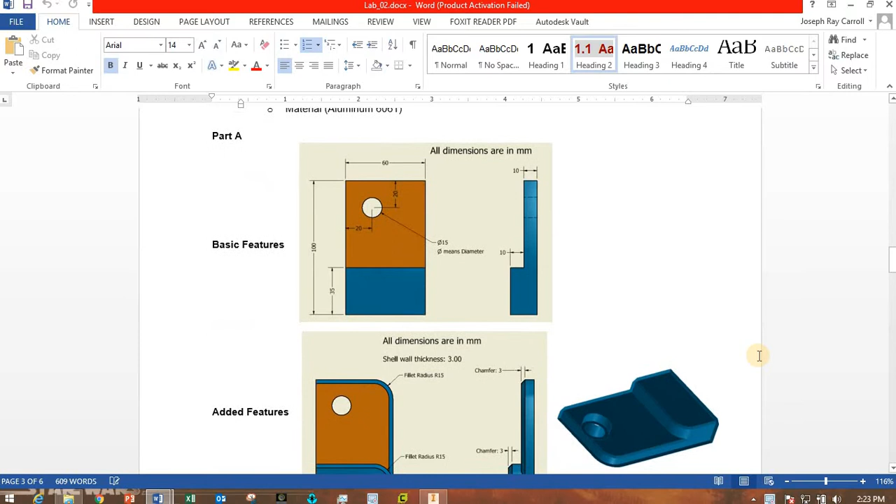If you have not tried to draw this part by yourself, I recommend you stop the video now and try to draw it without watching. It's not that hard to draw, especially if you've already completed these parts by watching the previous videos, since you should know everything you need to complete this part. Well, if you're still having trouble after trying it yourself, then this video is for you.

So here we go. First, go ahead and create a new part, and the first thing you should do with this part is save it.

Make sure when you save your parts that you're staying very organized. You should have a folder in your computer specifically for this class, then a folder specifically for lab 2, and within that, let's save this as part C.

Let's look at this part and think about how to draw it. There's a couple ways, and not necessarily one right way. One way is to draw this bottom profile right here, extrude up to make this base piece first, then sketch this profile and extrude this way to make that part. Or you could do it the other way around: first create this, extrude this way, then go create this piece here. Either way is fine. Let's see one way to do it though.

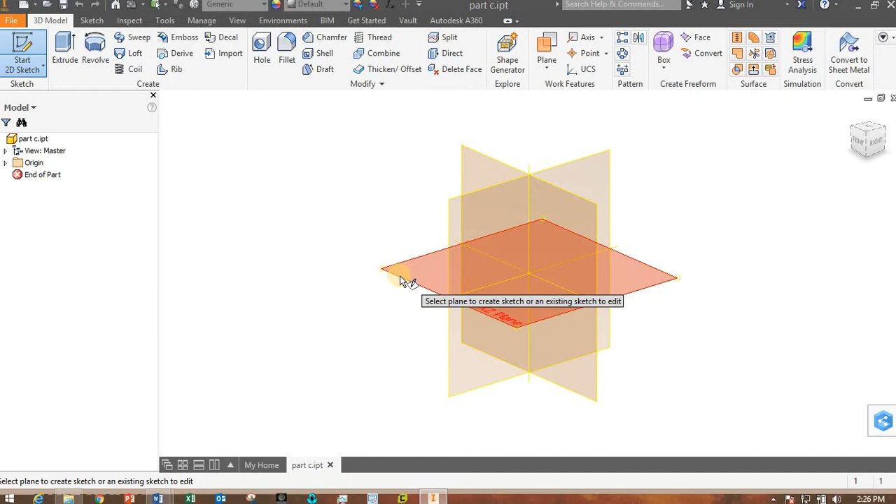Alright, so let's create a sketch, and I'll select this plane here to sketch on. Now the way I'm going to do it is I'll first draw this bottom, basically the bottom of this part, and then extrude up.

Now if you notice, this part is symmetric about this line here. So I want to keep that in mind when I design the part, and I want to draw it so that a mid-plane goes through the middle of this part. It will be helpful for creating things.

Watch this. I'll click on rectangle, and let's just draw a rectangle right now. Well, I want this rectangle to be centered here. I'll press escape to get out of the tool.

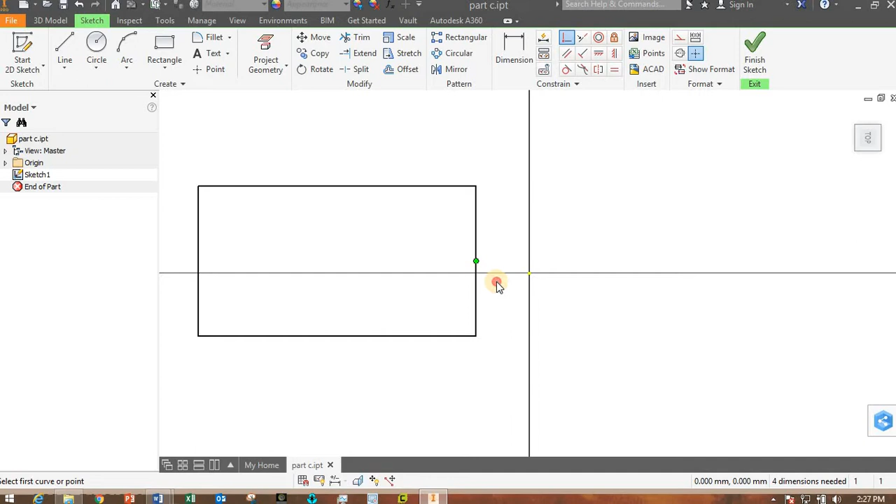Now I'll use the Constrain tool, and if I put my mouse here, that green dot is the middle of this line. So let's make that coincident with this part here. Now this line will always be in the middle. You can see when I move this line, it also moves. It always stays symmetric around this line.

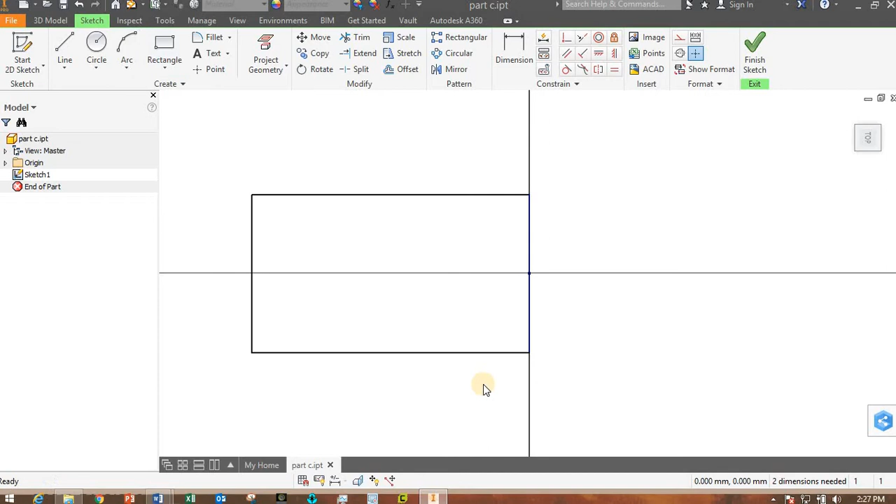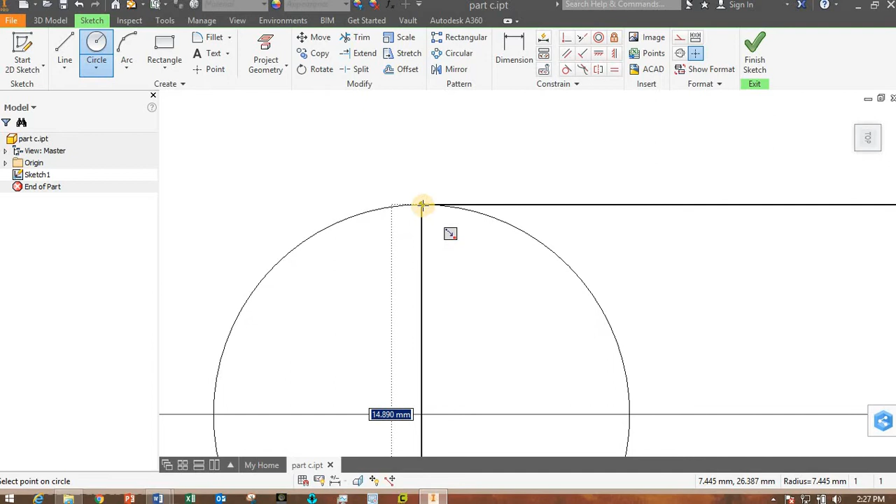Now let's go add in the curved part here. The best way to do that is to start a circle. Make sure your circle snaps to the midpoint of this line, and then make sure it snaps to this edge here. Notice how the center turns color - it's yellow now, now it snaps green. See that? Make sure that snaps green. Now the purpose of that is that if I change this dimension, the circle also changes as well, so they're linked together.

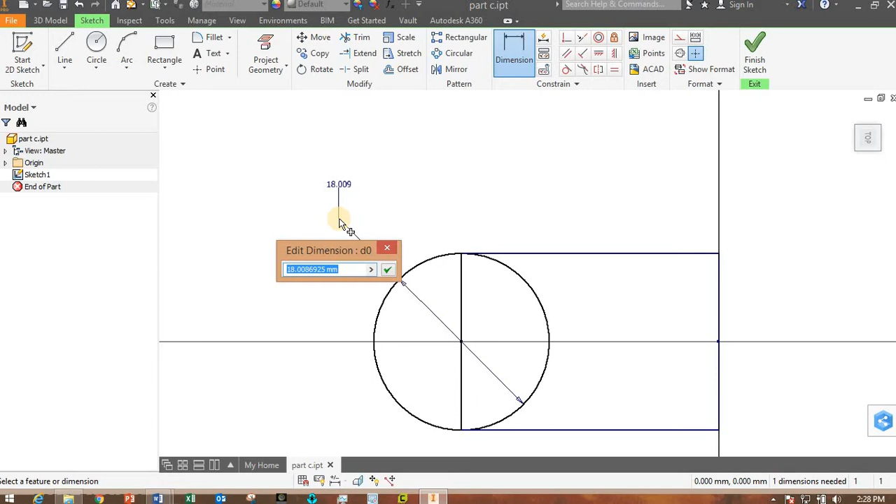Now I can just add a dimension. This length here, this diameter, is a 44 millimeter diameter, and the distance from here to here is 96.

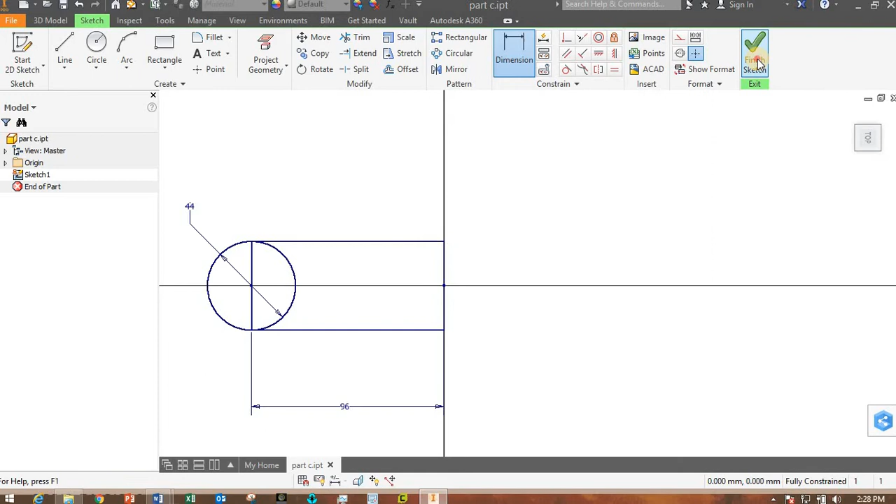Now I could also draw the slot right now, but it's good practice to try to make each feature as simple as possible. So let's go ahead and finish that, and now let's extrude up.

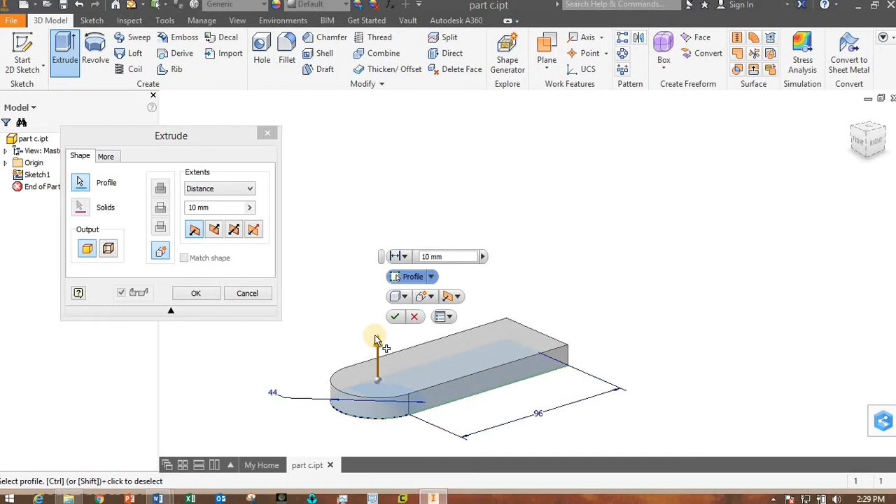Now I need to tell it what to extrude. I want to extrude this circle and also this rectangle as well, so both of those things. Now I'm going in the right direction, but I need to tell it how far to extrude, and the distance is 10. So I've got the base there.

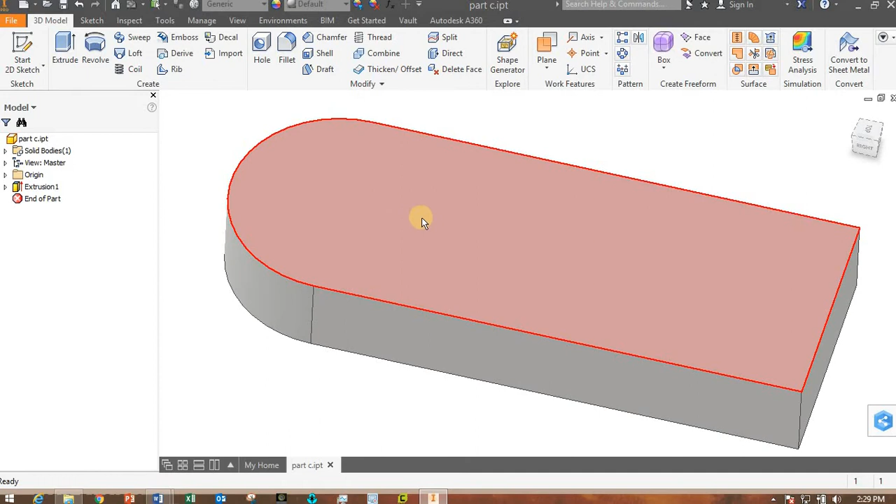The next thing I want to do is create the slot on top here and then cut it through the whole part. So I can create a sketch on this top surface, and there is a slot feature. If you click on this drop down arrow, here's a slot feature.

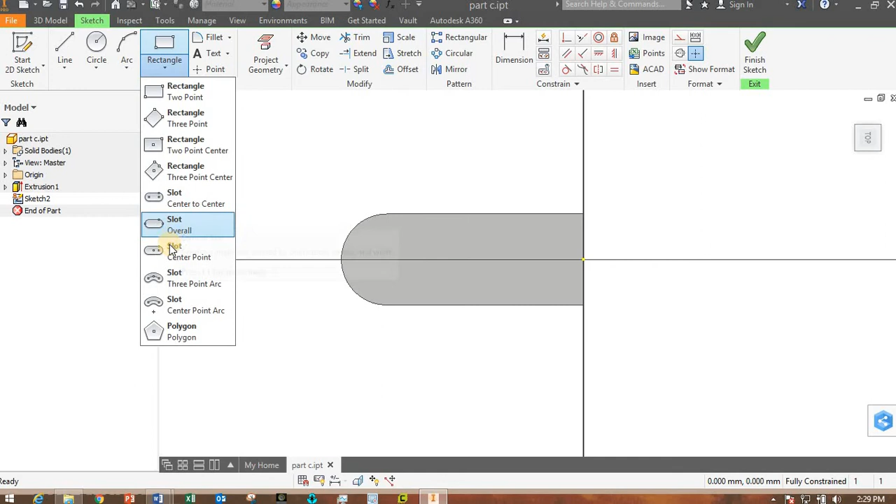Now there are several different slots, but it's basically just which way you want to create it. It doesn't really matter which one you click on. I normally select the center one, and I'll show you how I do this. So here's a slot. Right now this slot is not constrained at all, so I can move it around like this.

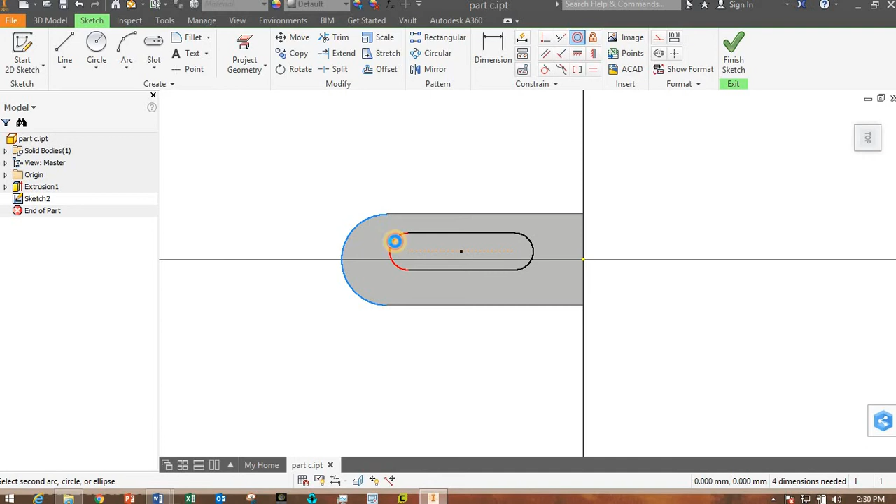The size is not constrained either, and this distance is not constrained, so I can make it shorter. But I want to constrain it. One way to do that is to click on concentric, and make this circle concentric with this one here. Now this point cannot be moved, and these two circles are concentric, which is what I want.

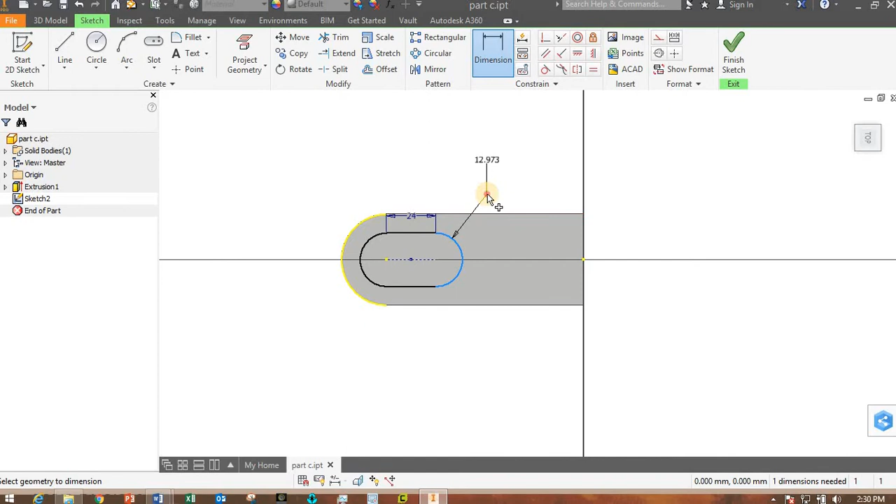Now I can go through and add in the dimensions I need. This dimension is 24 millimeters, and the radius here would be a radius of 8. Now notice it's turned color, it's blue, so we've fully constrained this slot now.

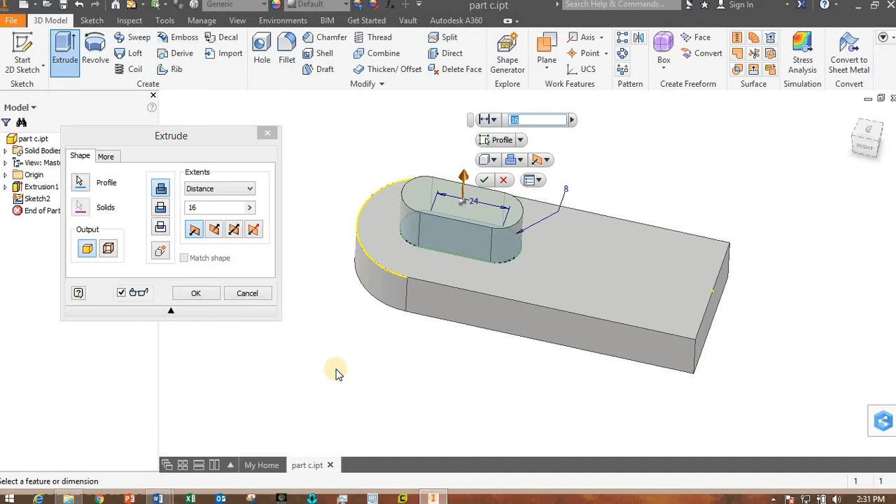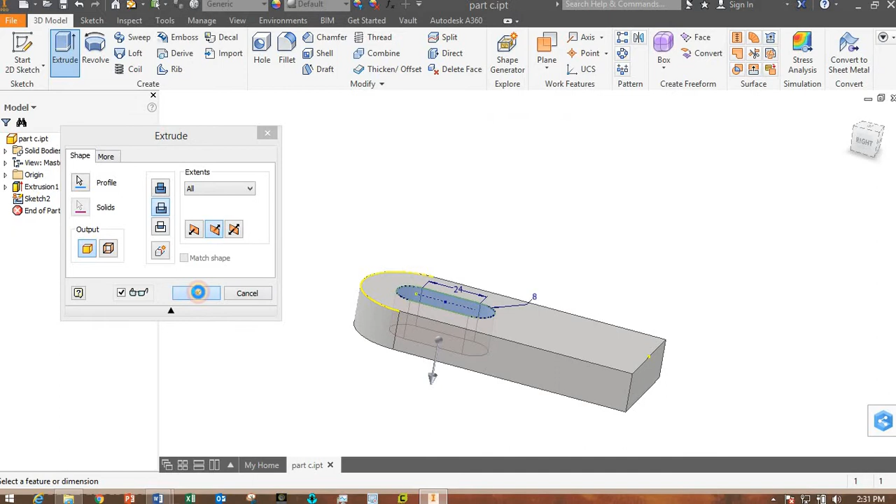Let's finish that sketch and extrude this. Remember, I want to keep my design intent in mind when drawing this. The intention of this design is that this cut should always go through the entire part, no matter how thick it is. So instead of making it a distance, let's make it through all. We're making progress.

Now let's go add in these parts here, looking at these holes. There are two main ways to do this, two good methods. One method is to first just draw one of these and then mirror it to the other side.

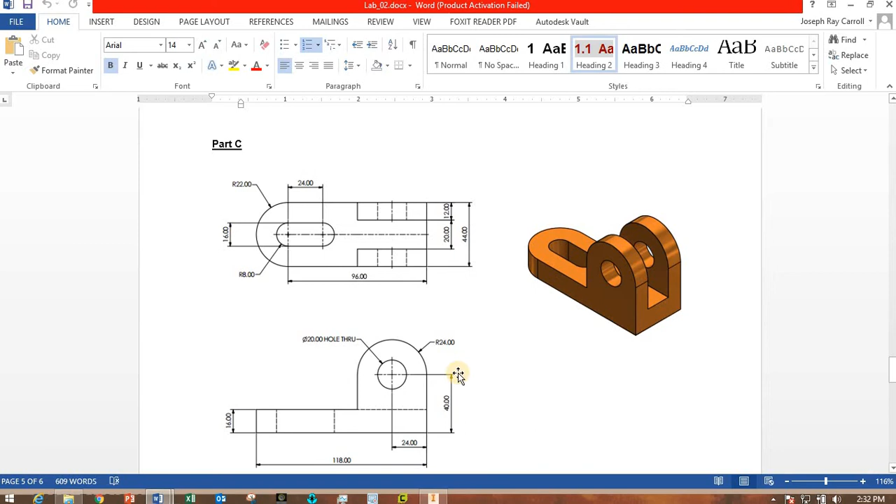I'll demonstrate that, but let me save my work before I move on. So let's start a sketch on this side here. I want to get a rectangle, and I want this rectangle to start right there. Make sure it turns green. If it's yellow, it's not snapped. I want it to snap to that corner.

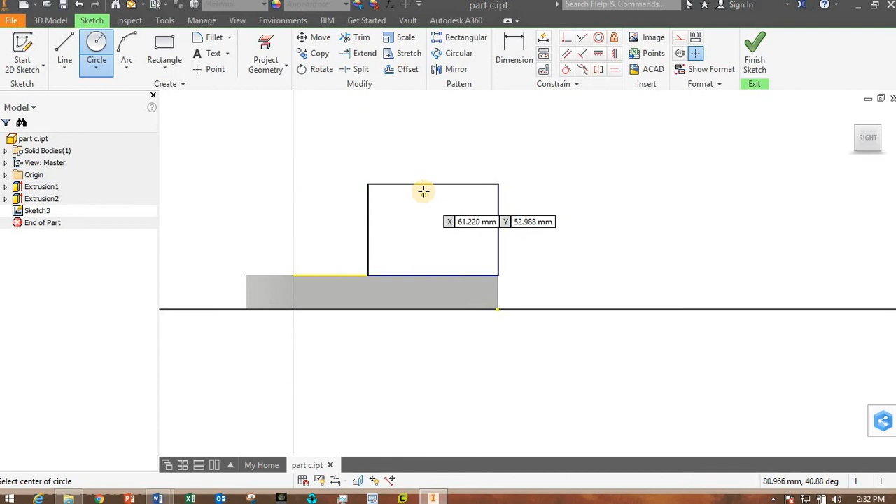And there's a rectangle. Okay, then we'll need a circle. Let's make sure it snaps to the midpoint. There it is. And then it snaps to this edge. There it is. Now I can go in and add dimensions here.

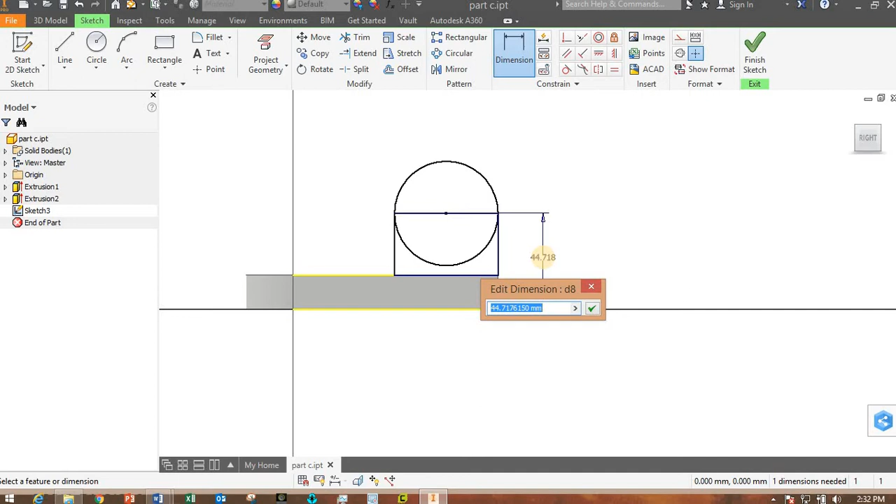We've got the dimension that goes from the bottom to the center of that circle. It's a dimension of 40 millimeters. And then this circle here has a radius of 24, so we could just do 2 times 24. This would be 48.

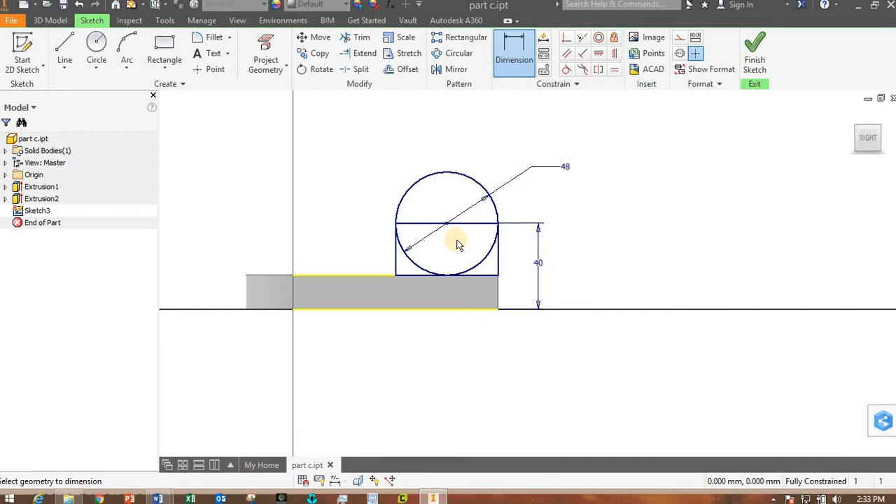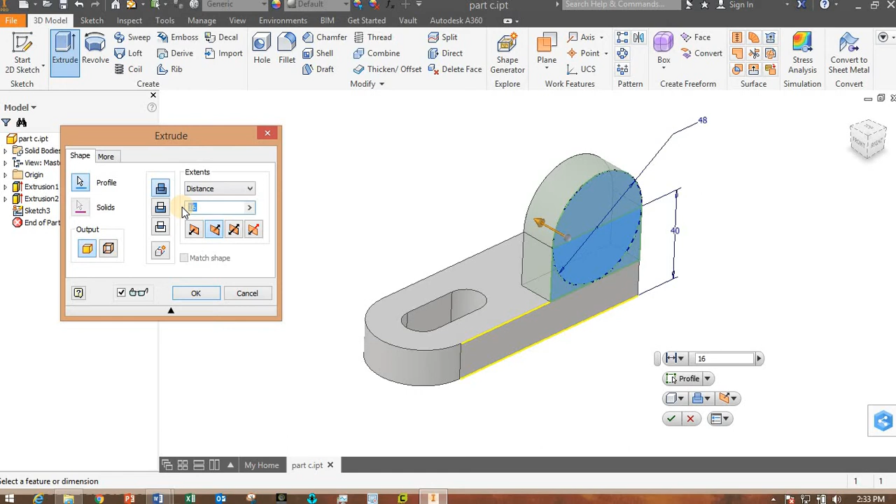Now I could go ahead and add this 20 millimeter hole here, but again, let's keep each feature simple, so I'll first create a solid like this. Let's extrude this rectangle and this circle, both of them. Now that extrusion is going the wrong direction, but that's no problem, I can flip the direction here, and then add in the thickness of it. The thickness is 12.

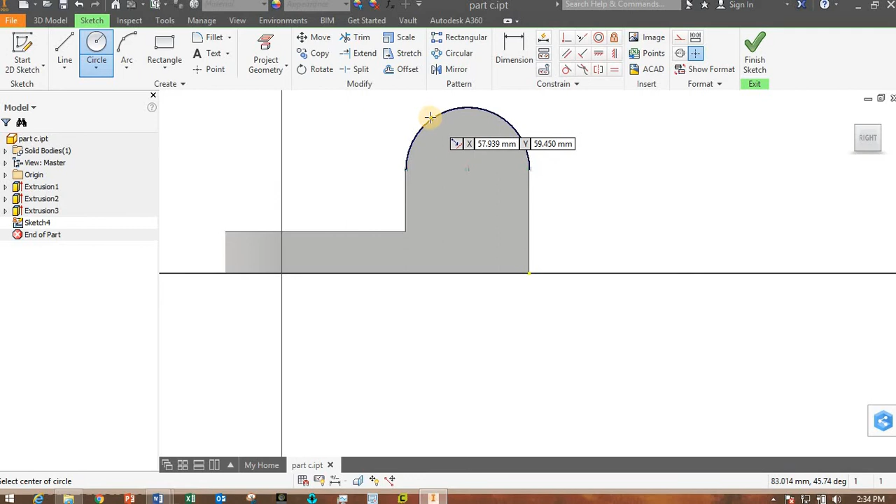Now let's go cut a hole. Let's create a sketch on this face, start a circle. Notice if I just put my mouse here, it's not snapping to the middle, and I want it constrained to the middle. One way to do that is if you put your mouse on this line and start to move over, you see it'll come up green. So it automatically snapped it there when I put my mouse over this line.

Now another way to do it is to just draw a circle and use these constraints. Let's use the concentric constraint and make this concentric with that. It's another way to do it. Now let's add in this dimension of 20. You can see it's blue now, it's fully constrained.

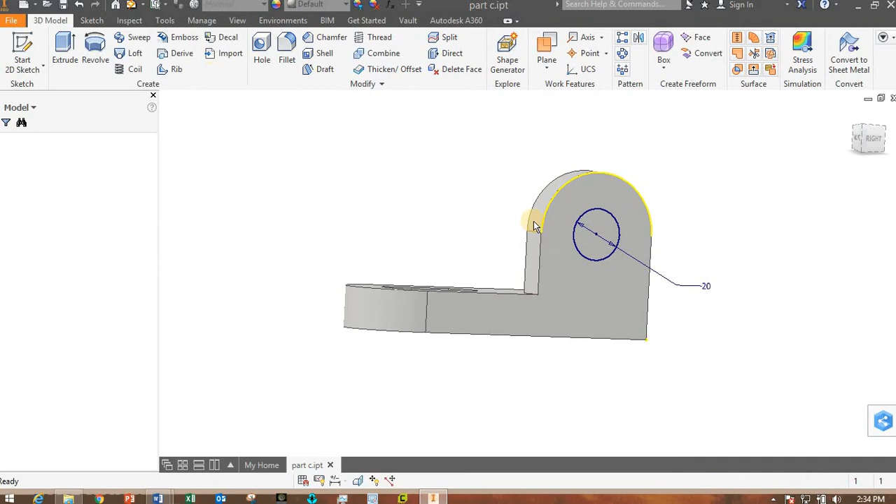Now let's extrude that, not as a solid, but as a cut, and go through all. Okay, now there's one of those. Now I just need another one.

Instead of drawing it again, since these two parts are similar, let's just mirror it. Here's the mirror feature. I want to mirror this feature and the hole, both of those things. Notice extrusion 3 and 4 is what I want to mirror.

Those are the features. Now I need to select a plane, so let's click this button that says I'm supposed to select a plane. I don't see a plane here, but it's over here under the origin. If I click this drop down arrow, I can see... is it this one, not this plane, not that one.

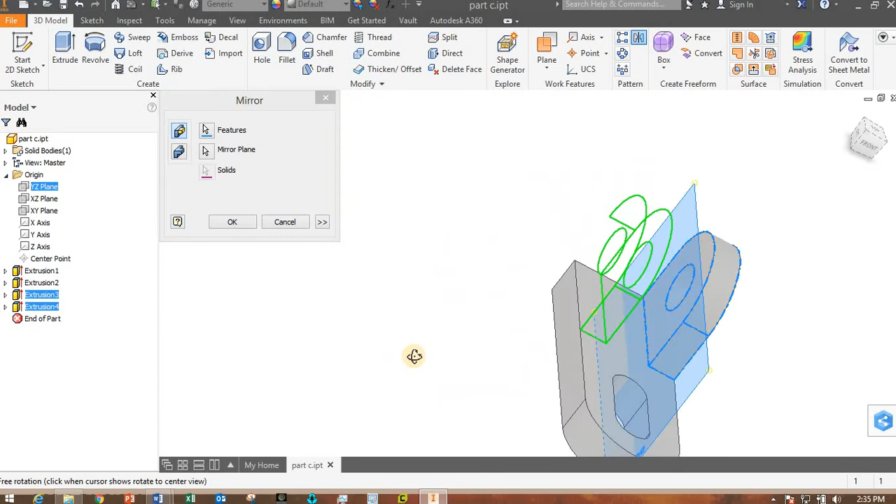Okay, that's what I want to mirror about right there, and you can see the preview. Click OK, and there it is. Okay, so we've got it.

Make sure to save that work. You should also go through and update the iProperties. Make sure you put your title here.

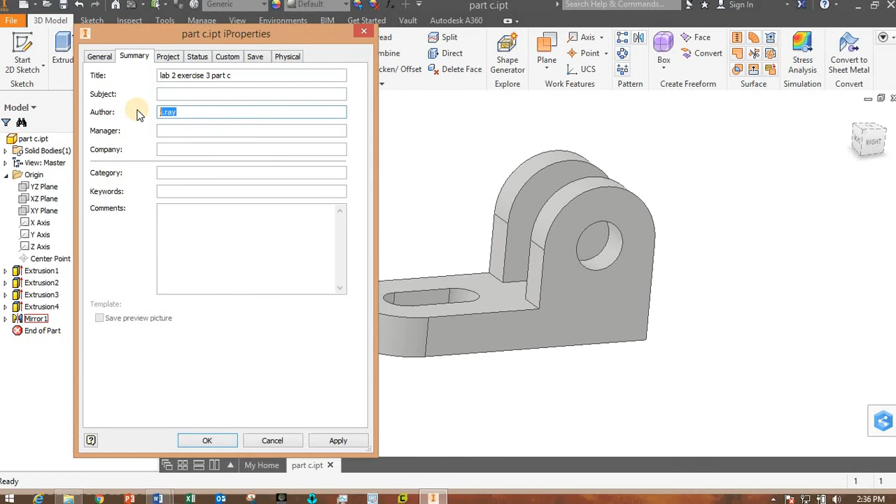Exercise 3, part C. Make sure to put your name here, manager, any description, company. Make sure you add in what type of material it is here.

Now let me show you another way to actually do this.

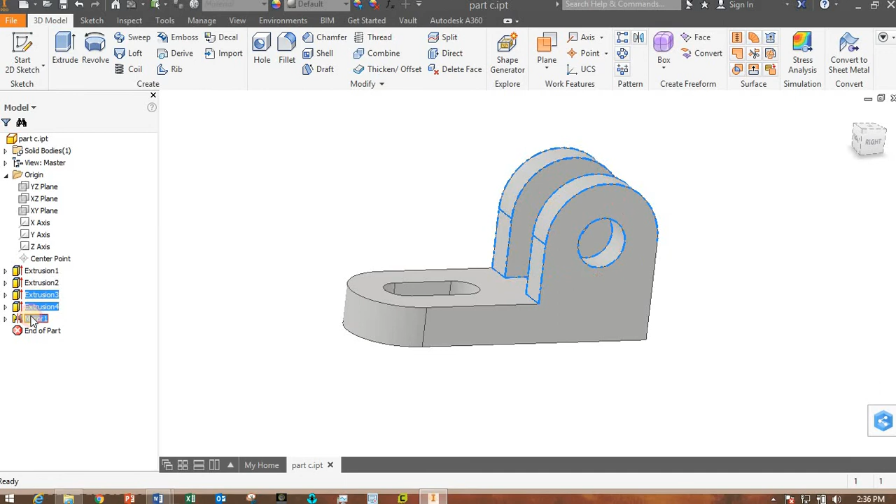Instead of actually drawing one of them, let me delete these. Alright, so let's say we're started here, we got to this point, and I want to draw these parts here.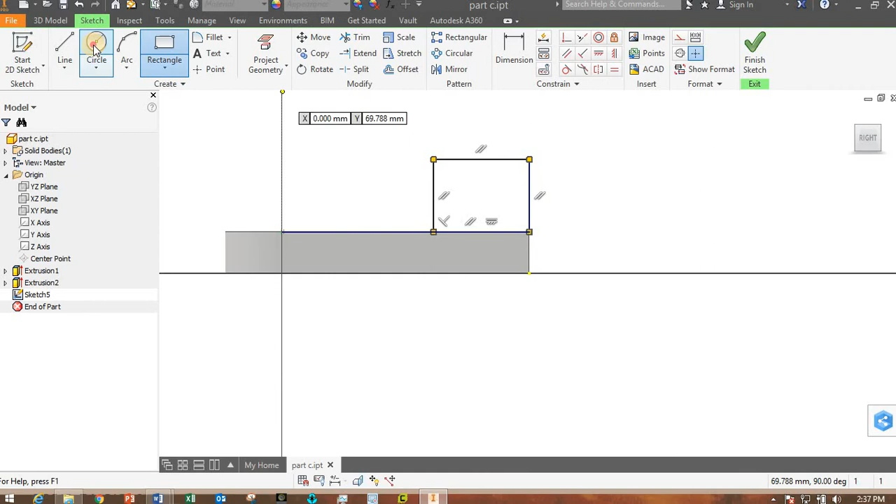Another way to do it is similar to what I did before. Okay, let's make it snap. I guess we can go ahead and add in dimensions here.

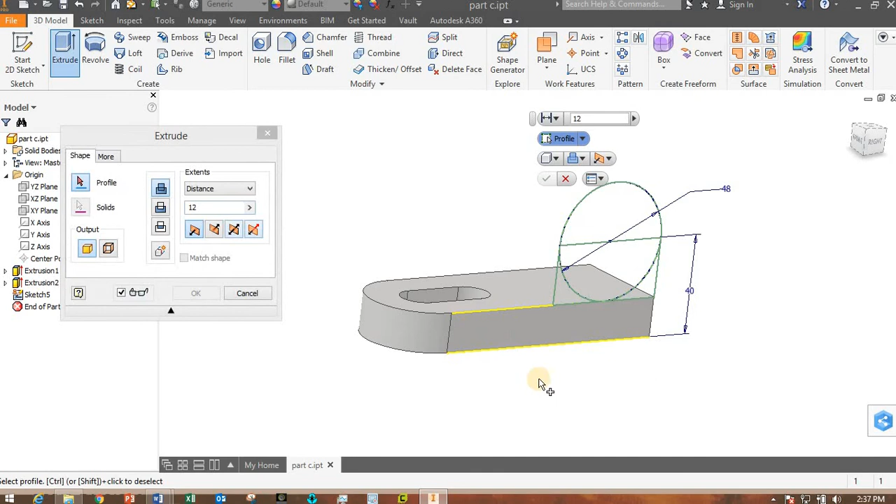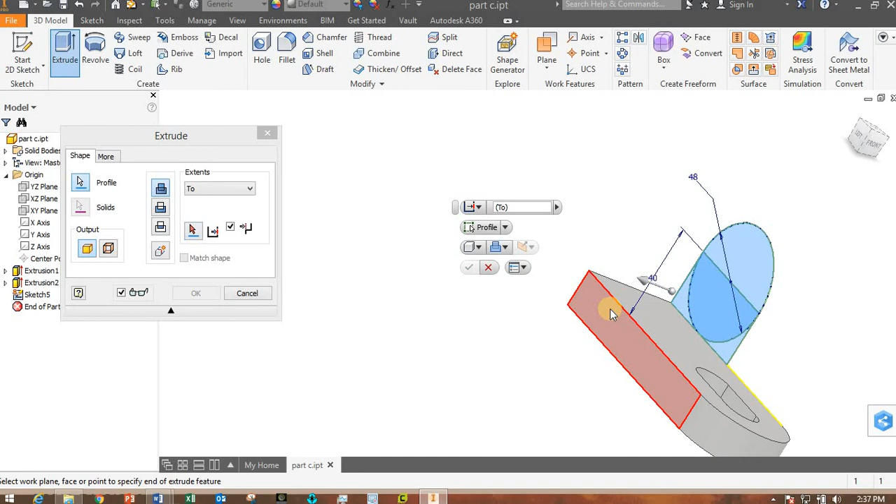Now watch this. This time I'm going to extrude it all the way across. One way to do this, I could try to type in the dimension and get it exactly that width, or another thing I can do is extrude to a face and say let's go to this face here, and it will extrude up until that face. Click OK. Alright, now I can go create a hole.

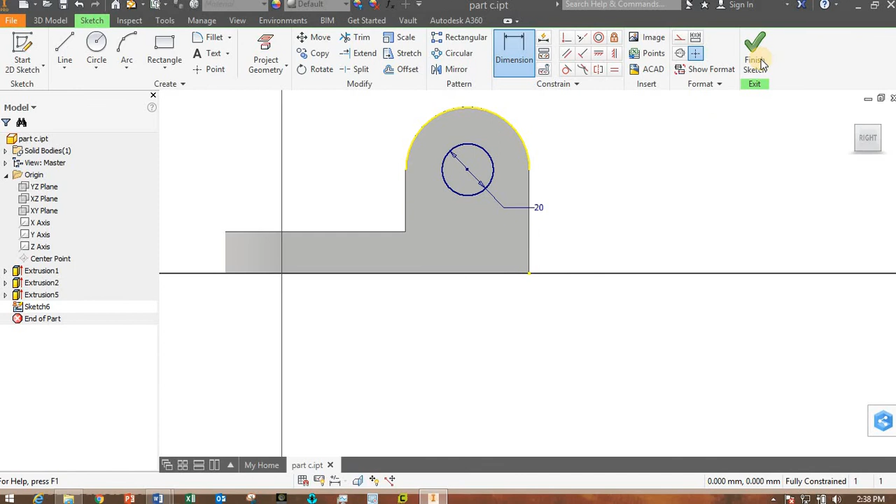Let's create a hole, whoops, sorry. Concentric - let's make that concentric with this. Can add in the dimension of 20. Extrude that hole through everything.

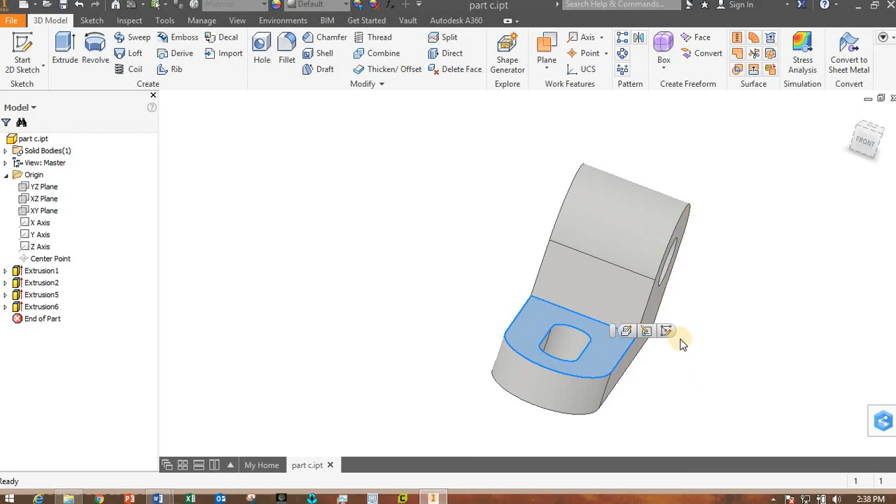Now you say, well, from here the only thing I need to do now is basically cut a slot here. Alright, so that's kind of easy to do. There's several ways to do it. I could create a sketch here and make a center rectangle. It starts here.

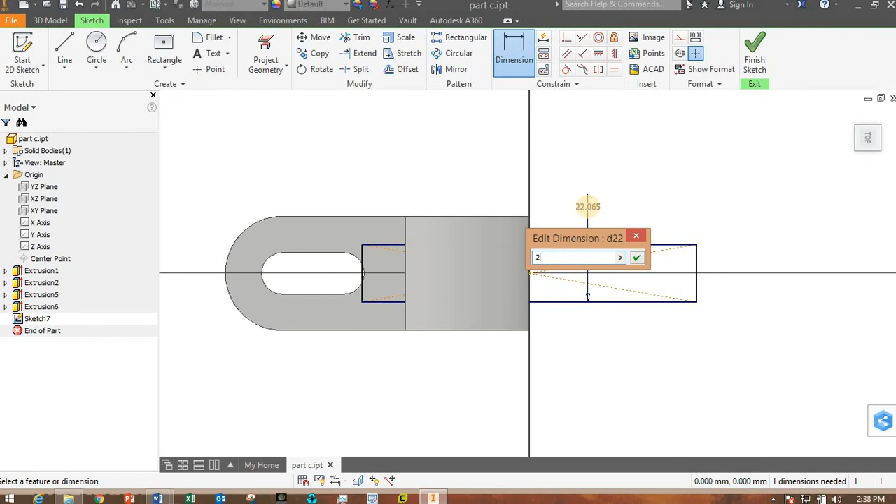Now I can add in this thickness, and basically I'm going to use this as a cut. So this is a distance of 20, and I can make sure that this is just long enough. This distance doesn't necessarily matter here as far as how wide it is, but it does need to be right, because this is not good - it's basically too short. It won't cut this part here.

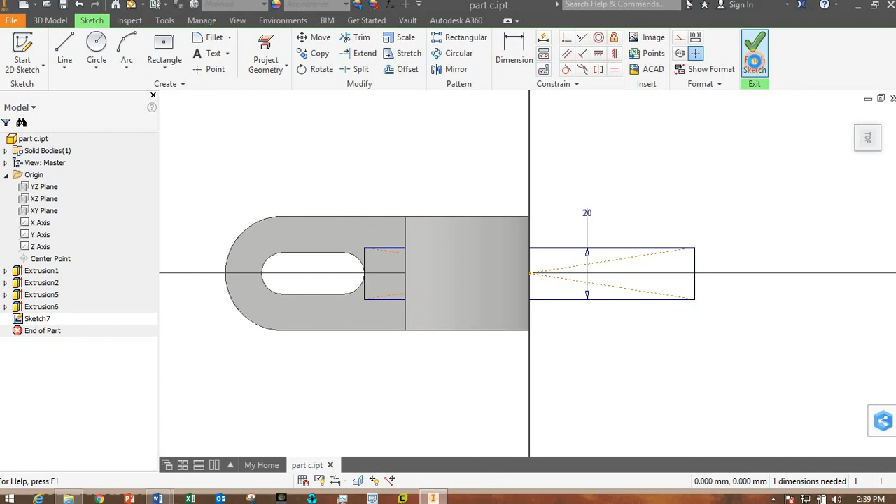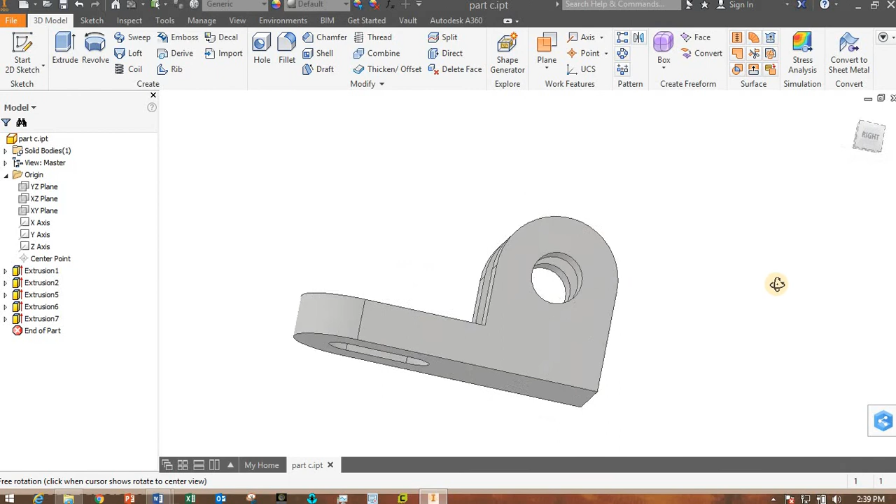I'll just show you what I'm talking about. Let's finish that. Let's extrude this, not as a solid like that - let's extrude it as a cut. Let's go the other way and go through all. So you see there, I basically cut out that section there. Alright, that's another way to do it. Both are acceptable.

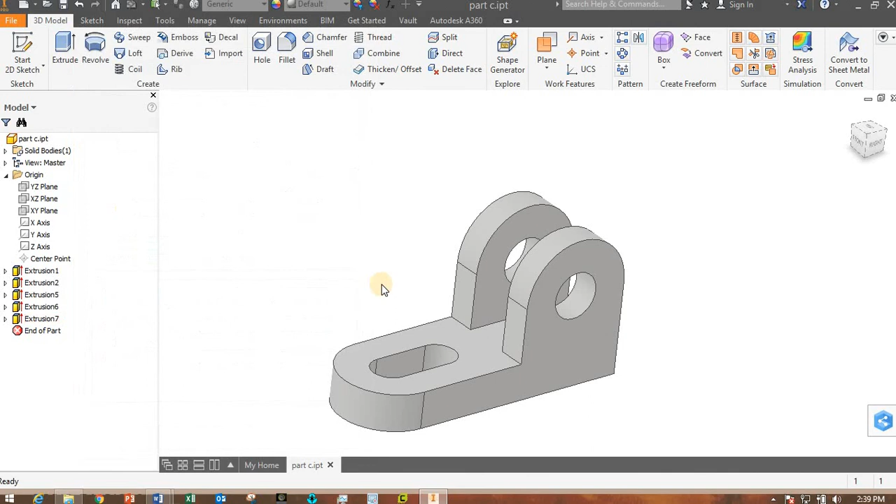And you can check and make sure that you've done it right by clicking on the iProperties, going to physical, and you can check the volume here. This is what the volume should be if you've done it correctly. Okay, so that's one good check there. Alright, thanks for watching. Hope that was helpful.